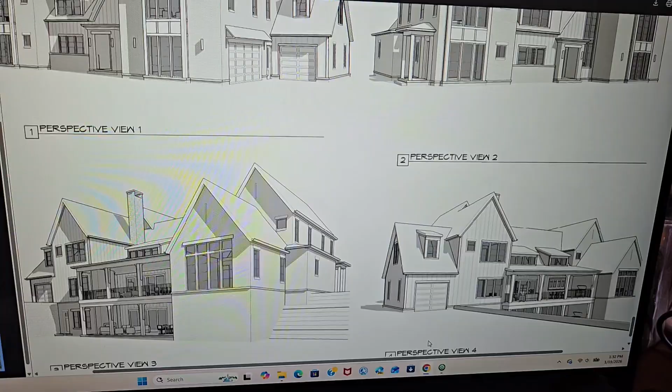Okay, so here are the plans I have drawn up for you. This is the house, pretty good looking house. I've actually worked on this particular model before. Like I always say, go through your plans first and leave yourself notes - floor plans, roof plans, elevations, walls, things of that nature. And once you've done that, we will go into the wood framing.

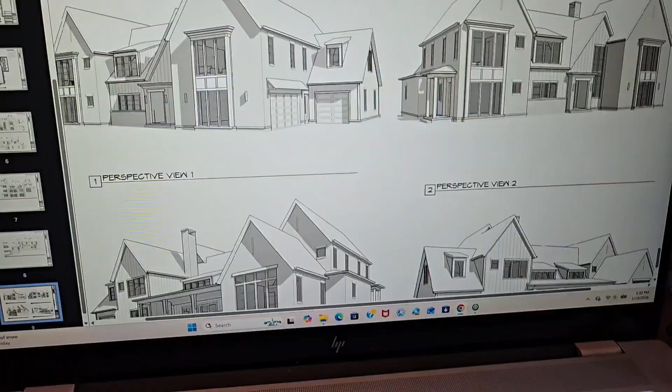So I'm going to pull up on-screen takeoff. You can do this by hand too, you can do a length and width, but when you do a new construction, it's good to use estimating software. So I am only focusing on the wood framing in this section. This is CMU, block, and brick veneer.

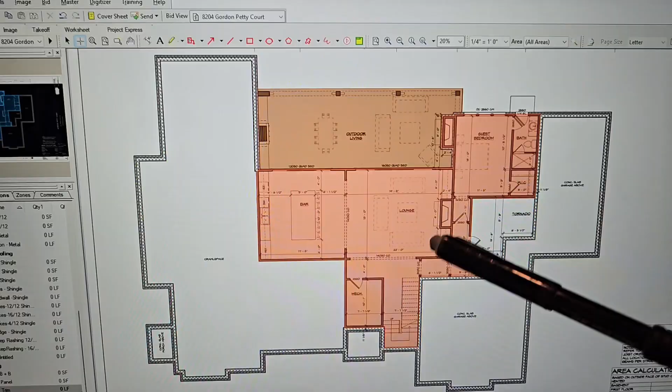But in here, this is the basement. I'm going to section off - it has a two-story patio here. So I'm going to section off the regular standard framing from the patio framing. The company I work for or am contracted with at the moment likes to separate between the two. So I have my basement square footage and I have my porch framing. Now at the end I'll have the grand total just to see what that is and make sure the numbers line up when I do a per square pricing.

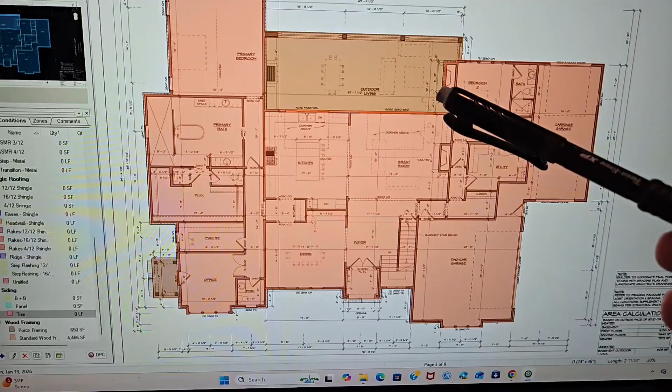Then I'll go in and I'll do the same thing, except this one has the smaller porch that is only on the first floor. This is the first floor. I have the porch here, so the basement, and then I have the rest of the wood framing. Again, you could do the tedious work of length and width to figure out the square footage, but good software like this is great when you're working with new construction.

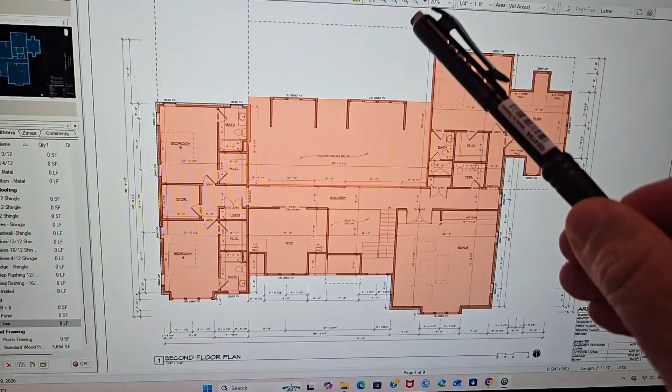So I have my first floor, my second floor, and my basement all calculated, and this is the second floor. Here are the dormers where the roof ends. This is a lower roof section, so I just need to grab this amount. And that's going to give me my total of standard, and then my total of porch framing, and then my grand total of framing here.

Now, here are the steps to estimate wood framing. Once you get your lumber package - you can get a lumber package at somewhere like Husky or a good framing company like that sells the wood. You can send them the plans and they'll give it to you. Yes, you can do this by hand too, but if you're wanting to estimate on a large volume, go ahead and send that stuff off.

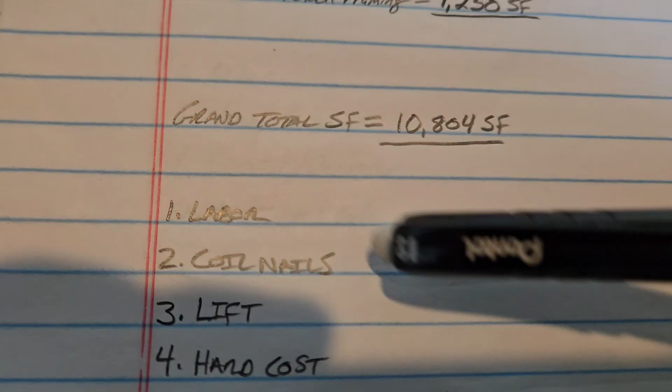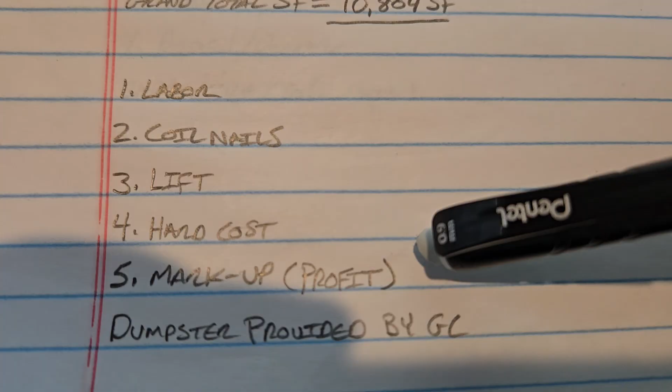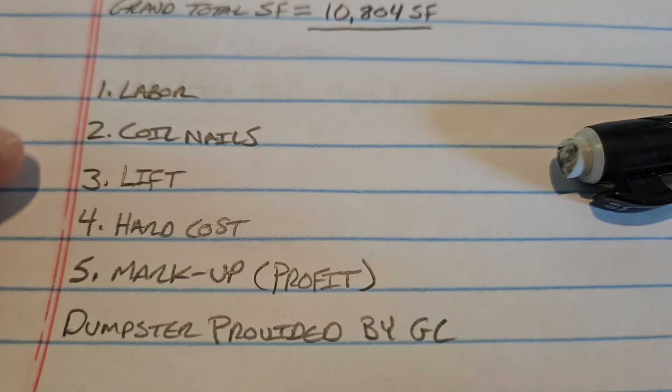Have all your 2x4s, 2x8s, 2x6s, everything allocated and counted for. So on this particular job, the GC is actually going to be supplying the lumber package. So I have to work on labor, my coil nails, because we will provide those, the lift, the heavy equipment I will need to put it together, my hard cost of what this is, what it costs us to do it, and then I put my markup on. Now the dumpster is being provided by the GC, so I don't have to worry about a dumpster either. But if you were running this project as the general contractor, you would need to allocate for the materials as well as disposal along with these items here - labor, coil nails, lift, hard cost, add your markup. And that will do it for framing.

Quite easy. Let's move on to siding. So we are not worried about the brick veneer.

That is going to be covered by others. I'm not estimating that for this project.

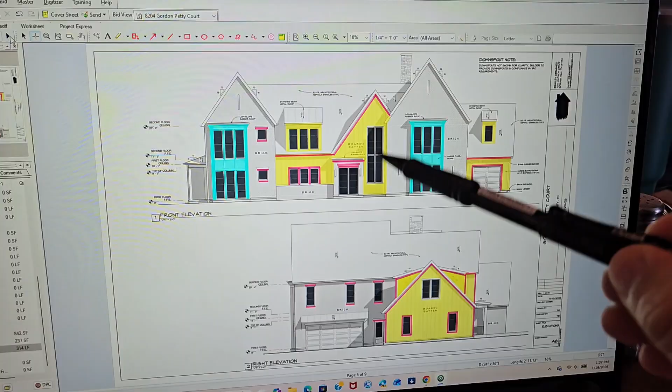But here we go. If you've already done the roof, then you have your eaves and your rakes, so figuring and calculating for soffit and fascia is all done. All you have to do is add your eaves and your rakes. If you have two different roof systems, make sure you add them both up. So I have metal roofing and shingle roofing. I add up all my eaves and all my rakes, and that gives me my soffit and fascia cover total.

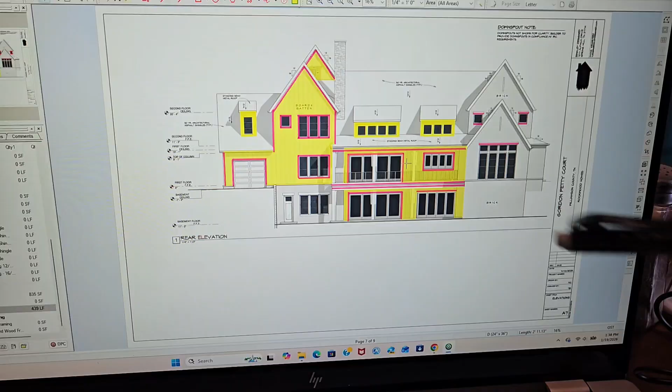So that's already done. My porches, my porch ceiling, I just round up to the nearest square, and I already did my porches on the, let me see if I can pull up the elevation here. I've got two ceilings here, and back to the other page, I have one ceiling here. And that was already counted for in the framing, so our porch ceilings are done because that's going to be a different material.

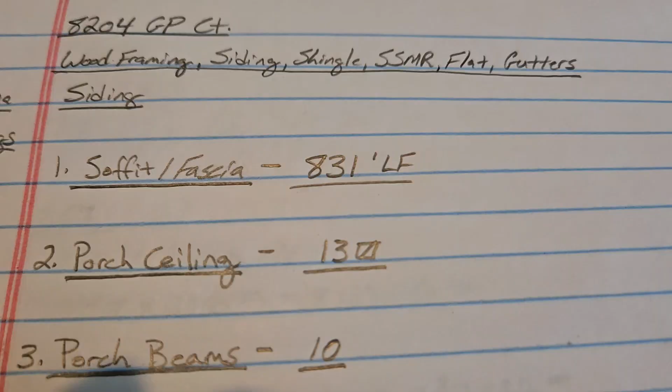The porch beams, I go through and count the beams, and a lot of times you can find those on the floor plans as well, but they're going to be on the elevation. So I count the porch beams because we're going to wrap those in a Hardie siding as well.

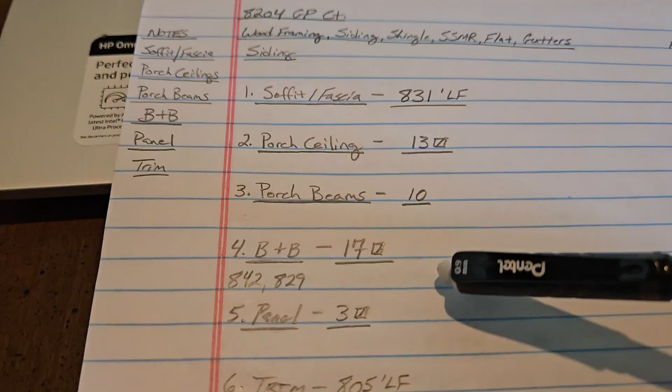Once I have my porch beams, I go into my board and batten. This is not lap siding, this is actually board and batten here. And if you're going to cut out for the windows, make sure your waste factor is more than if you're just pulling it and covering up the windows with your estimate or your takeoff, excuse me.

But the board and batten is in yellow, and then from there I have my panel siding. So this is like a Hardie panel in blue, and it's a different material too, and it costs a little bit more than your board and batten. So I separate that out because I got to allocate more money for this.

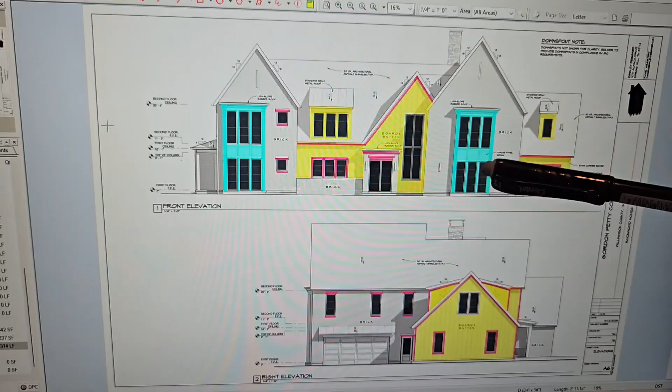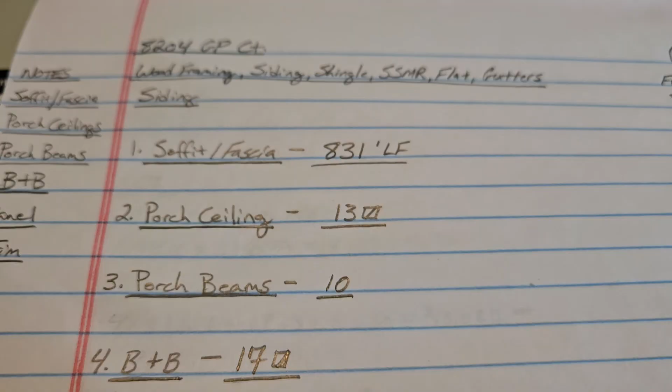Then once I do that, as you see, the pink is my trim. Let's see here, if you can zoom in some, besides the soffit and fascia, there's actually trim board running along this. Now, that will also vary based on price, but I'm going to go ahead and count for my trim. So I have, this is a board and batten, not a lap siding job, so I have my soffit and fascia. You can have that in probably every job. My porch ceiling, my porch beams, my board and batten, and my panel, and of course my trim.

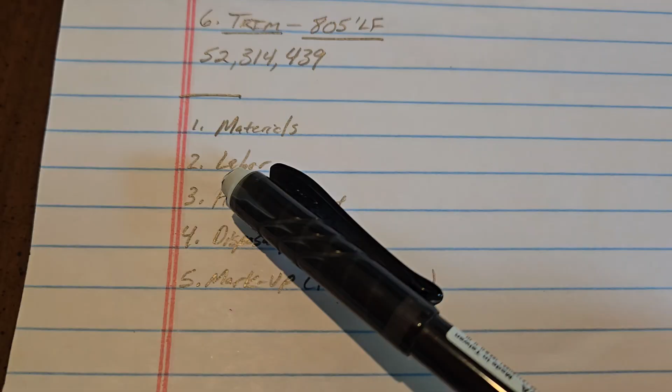Now, once all that's done, we usually supply the materials for this type of project. So I'm going to estimate this like this: materials, my labor, my heavy equipment if I need a forklift or something, my dumpster disposal, and that's also going to be provided by the GC, the dumpster, but I would normally calculate that if I need to. This would be my hard cost, and then I would put my markup, my profit on top of that. And that's how you quickly estimate your

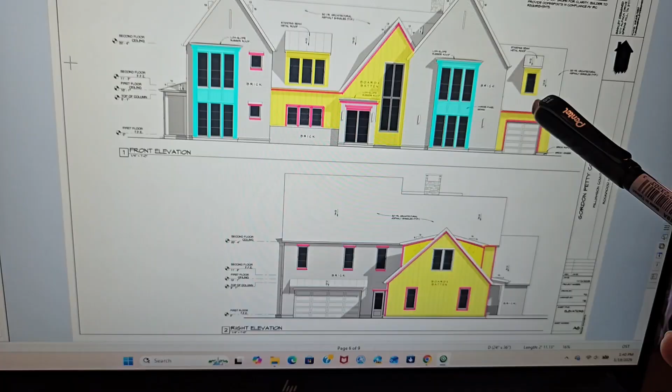siding on a project. Now, make sure when you're doing a siding project like this, sometimes they don't always show the sides of dormers or always show the sides of pop-outs. So go through and see if all the elevations are correct. If they are hiding something, make sure you double up on a section to give yourself enough material, and make sure you put a decent waste factor on that.